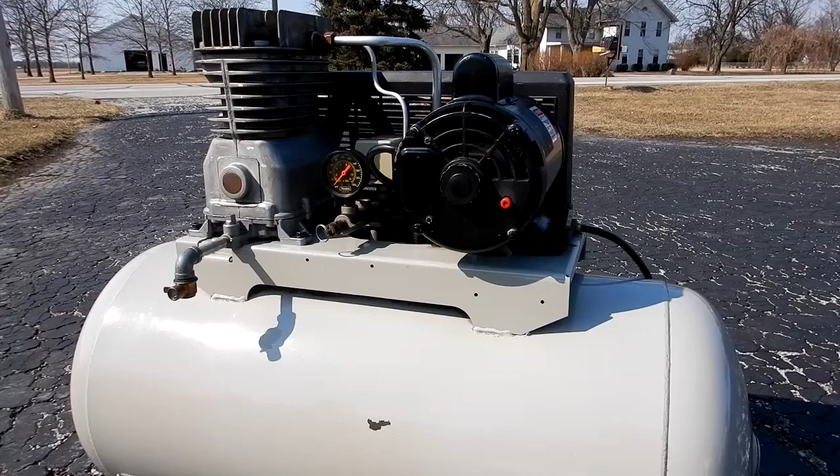Well guys, this is my beloved stationary air compressor that I bought from Sears back in 1984. This actually was made by DeVilbiss though, the DeVilbiss Company, and I just put this out of commission 3 years ago in the summer of 2019, and I haven't used it since. I was going to make it a portable unit, just never got around to it, so I'm going to put it up for sale, and I thought I would showcase this before I do that because it's been a very good compressor. No issues. It runs strong to this day.

This is the model number 919.170250. The manufacturer number was a 383-01185.

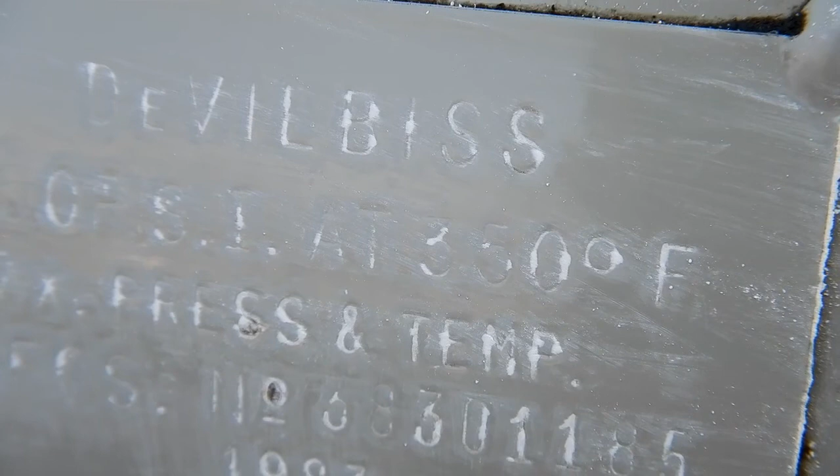Alright, it's somewhat hard to see that tag in the back, so I went and put some chalk on it, wiped it off so we could see the imprint better. But it says DeVilbiss. It's got like a maximum temperature of 350 degrees Fahrenheit, and something about the air pressures. We have the manufacturer number, which I read earlier, and then it shows the manufacturer date, 1983. And as I said, I bought this in 84. I believe it was in the beginnings of 1984.

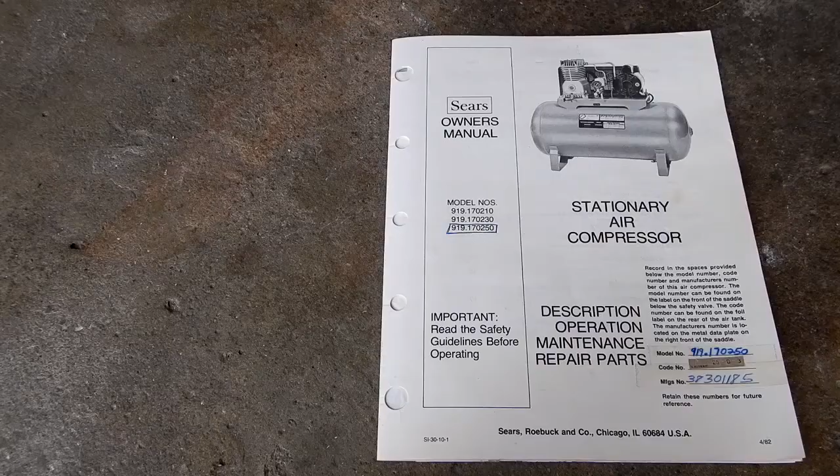As you can see here, guys, I still have the original manual. Here are some of the specs.

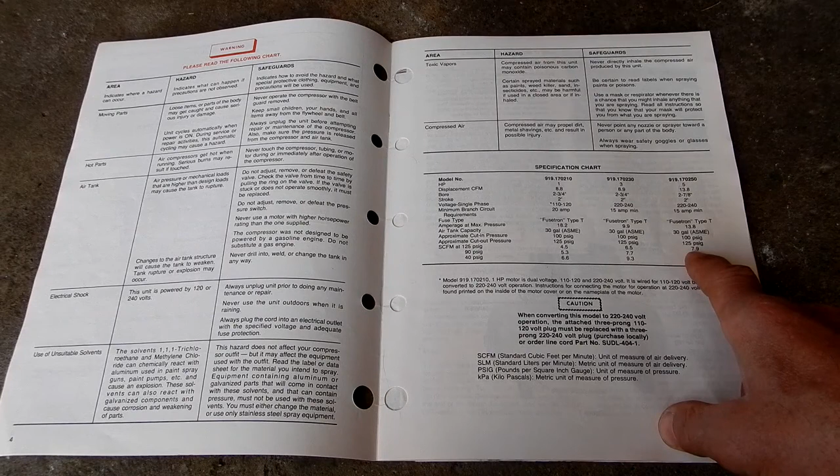Now, they had a 1, 3, and a 5 horse model. Mine is the 5 horse. The displacement, cubic feet per minute, is 13.8. The bore is 2 7/8 inch. The stroke is 2 inch. It's a single phase from voltage 220 to 240. Minimum branch circuit required 15 amp. Amperage at maximum pressure 13.8. And it is a 30-gallon tank. The approximate cut-in pressure 100 psi's. Approximate cutout is 125. And then your capacities, the cubic feet per minute is 7.9 at 125, 9.3 at 90, and 11.3 at 40.

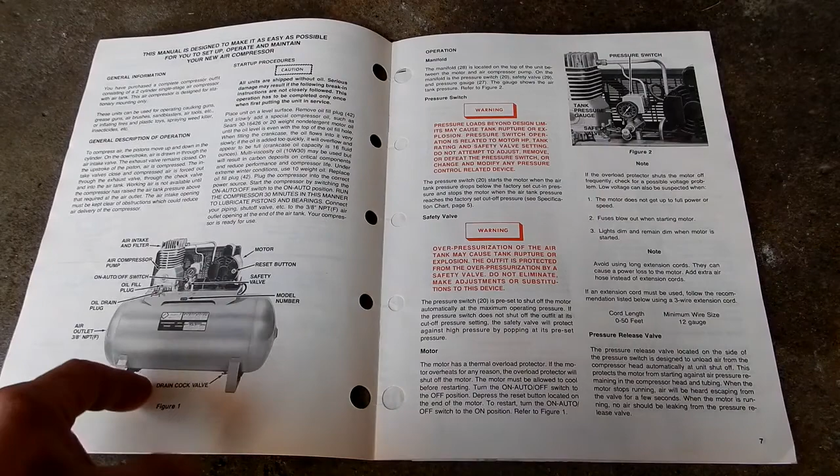And then page 6 and page 7, it shows what the various different parts are of the compressor. Over here it shows the pressure switch and gives you information on all that.

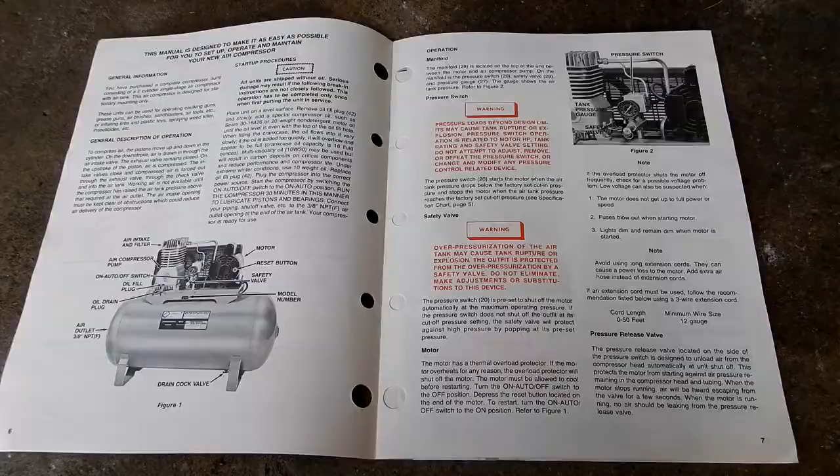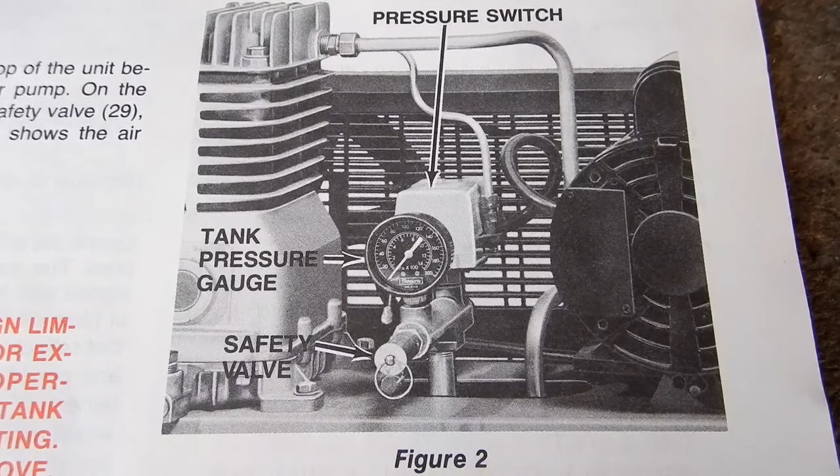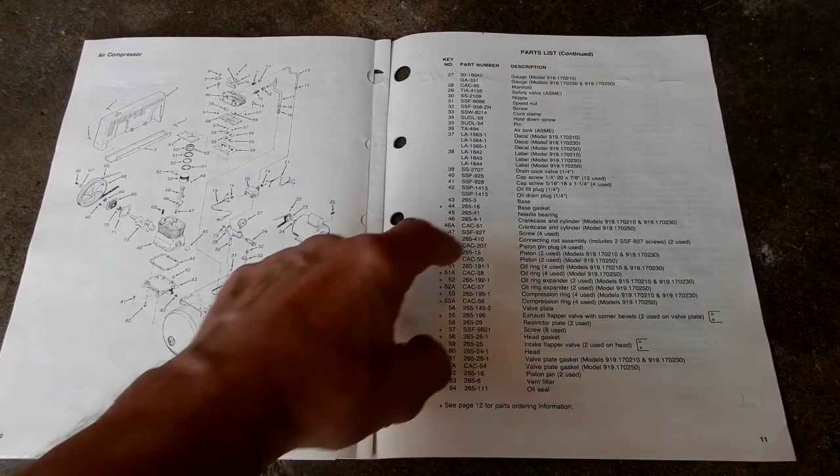Now I've attached a few things on this side, and I'll show that later. But here we have a parts list. And then here we have a breakdown of all the parts. More of a parts list over here.

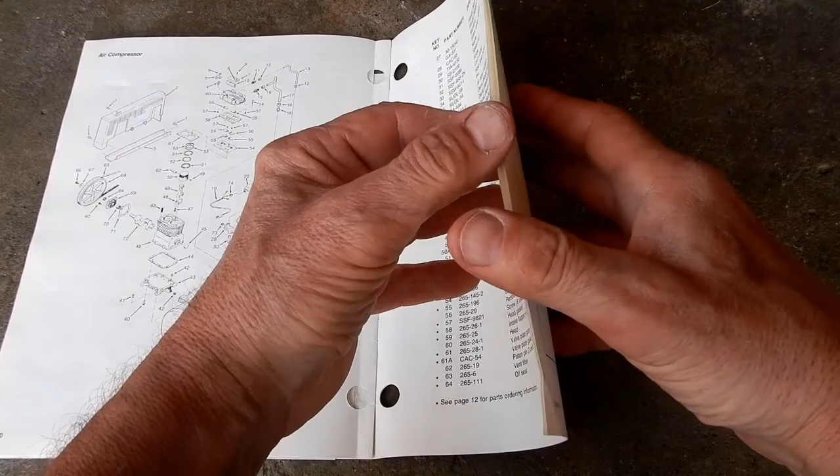And this happens to be, just several years ago, I bought a brand new belt for it. The old one was looking a little bit rugged, cracked, so I bought a new one, and that's why that's there. And then here we have the belt information I wrote down when I bought that belt. It is a 46-inch belt.

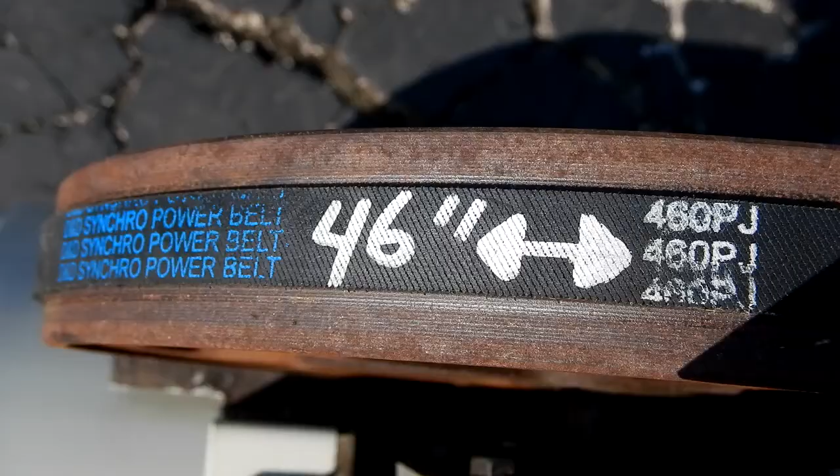Now guys, this is actually part of the catalog when I bought this compressor from Sears. Now you can see the one I have is down here, the 5 horse. It's at the very bottom. Again, it's showing the catalog number as a 30 T 17025N. And then we go across here, we see that it was 158 pounds, that's the shipping weight. And we're going to see that the price was $739.99. I bought this back then for $619.99. That was a hell of a lot of money back then.

But again, this is a DeVilbiss. I'm telling you, the thing is made exceptionally fine. Hell of a good unit. Again, $619.99 is what I paid for this.

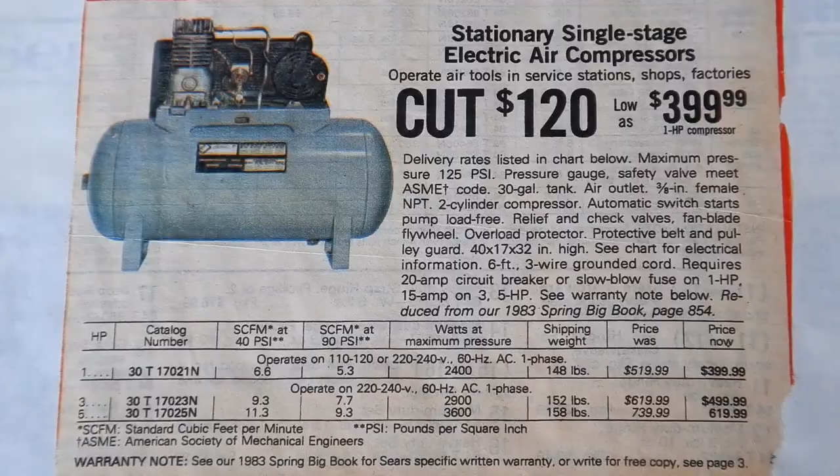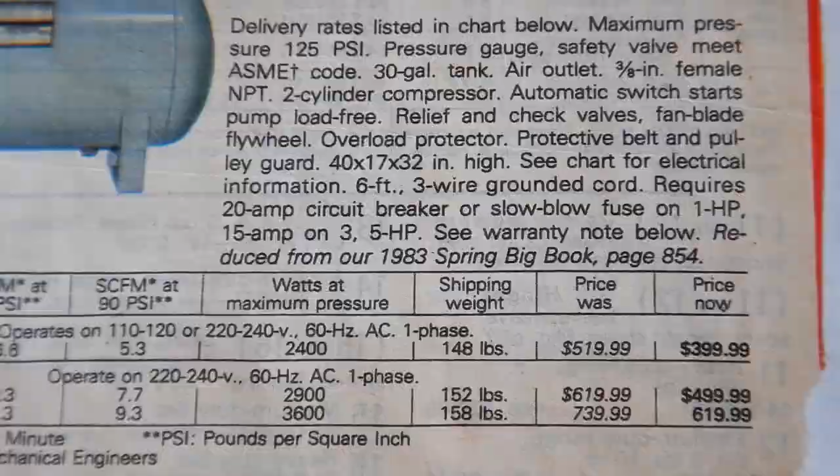This was an interesting article that I had found. It was from Thursday, March 20th, 1986, page 43. And it is about the 1,000,000th Craftsman compressor to roll off the production line at the DeVilbiss Toledo plant.

Well, guys, how times have changed. I'm not sure who's making them anymore for Craftsman. I do know back in the day, I bought a lot of tools from Sears, and a lot of their stuff was made by very good manufacturers back then, and they would just put their name on it. And again, this DeVilbiss is just an excellent unit, and can't say enough about it. Even though it's old like that, it's still strong.

Change your oil every year, you know. And I always had a fan mounted above the air compressor, so if it ran for more than normal, by that I mean if I wasn't just using it to air up a tire, but if it was running to run an air tool or doing something longer, I had that fan on because it was in the back corner of my garage, and I wanted to make sure there was good airflow going across the unit to help keep it cool, you know.

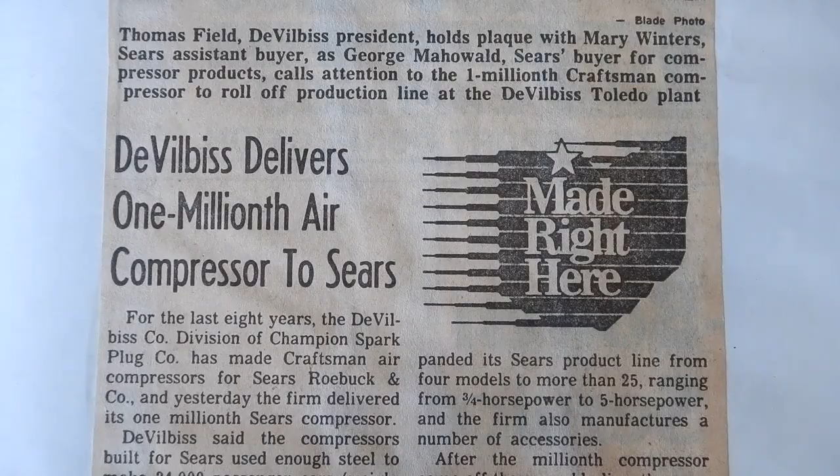So anyways, can't speak highly enough of this compressor. And for anyone interested, you can pause the video and read this article.

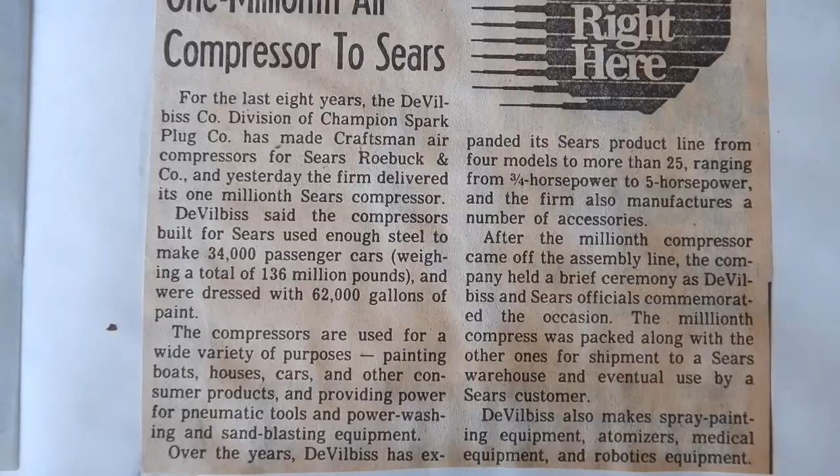So I found this little tidbit of information. DeVilbiss Air Power Company was founded in 1888 with headquarters in Tennessee. They manufactured air compressors, air tools, pressure washers, generators, and more. Today the brand is included under MAT Industries, LLC. In 1999, DeVilbiss was sold to Pentair, who then sold their company to Black & Decker in 2004.

And something else I found: Stanley Works merged with Black & Decker in 2010, and then Black & Decker sold the DeVilbiss Air Power line to MAT Holdings in 2011. Amazing how you don't know today who makes tools that used to make their own tools. They sell out to so many different companies, you really don't know anymore. For any further research, if you're interested, Wikipedia has something under MAT Holdings that gives more information.

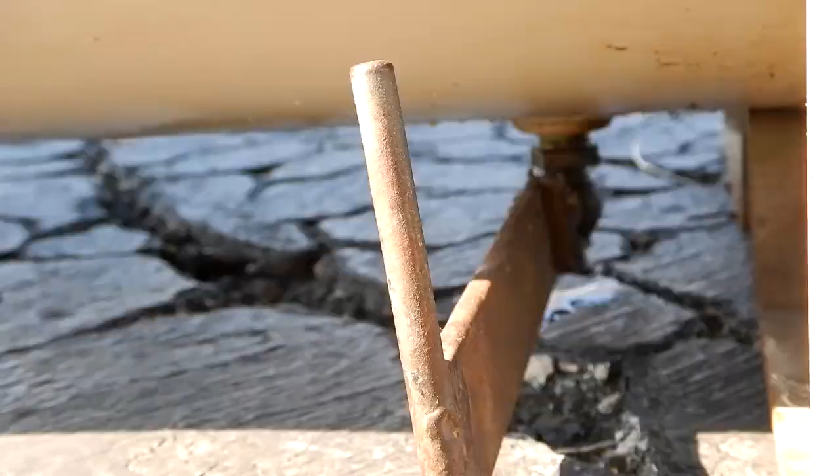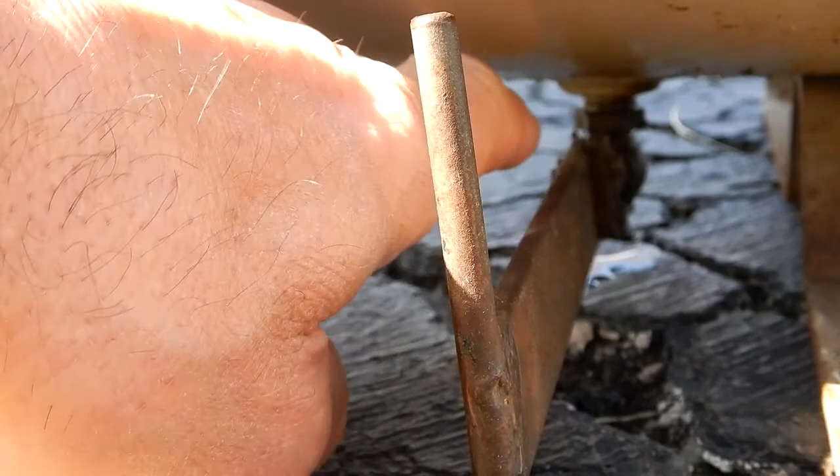So let's check this out. One of the things you see here is the original drain valve that came on it. I replaced it with a different drain valve that had a larger handle on it, and it's hard to get back in there. Again, this was permanently mounted.

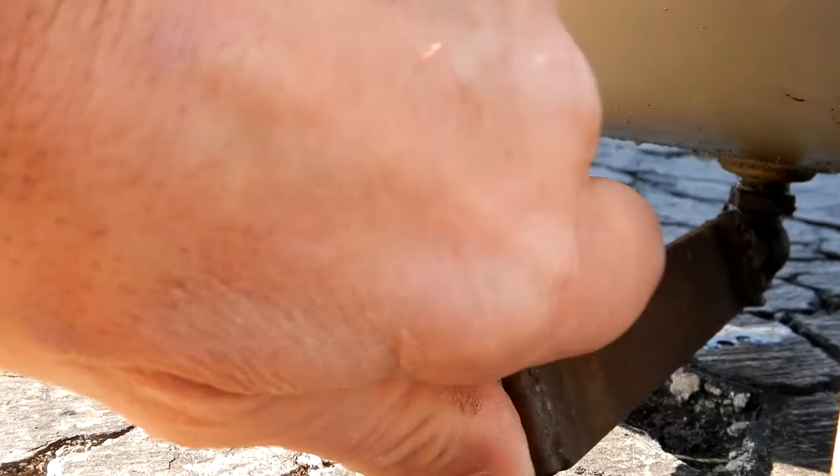So what I did is attached this flat bar stock, and then brazed on this handle here, so that when I wanted to drain it or close it to operate it, all it was a matter of turning this like this, and you close the petcock there, or to open it like this. It worked out very well.

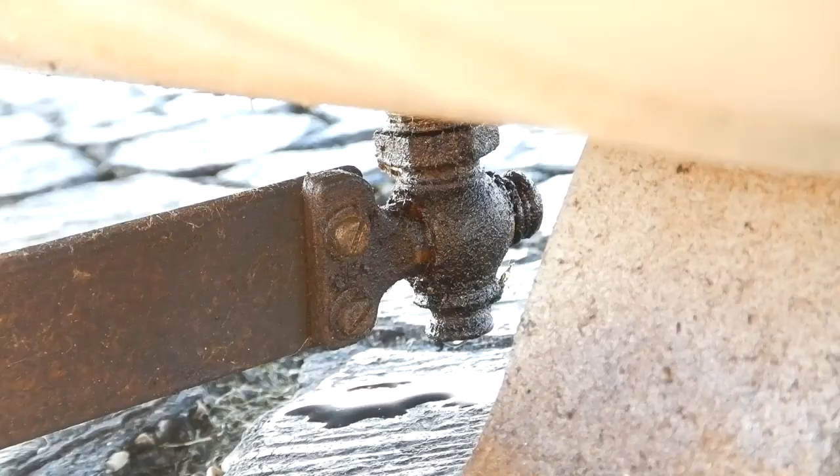The handle being like this, parallel with the tank, meant it was closed. Like this meant it was in line with the flow of the petcock. Otherwise, I don't know how you'd be able to get in there, because it was very hard to get your hands in there with the original setup. I had to change the petcock because it needed a different type of handle. Here's a close-up of what I'm talking about. You can see how that is and how I attached that extension to the drain valve. That's original, from shortly after I bought it, and it's been on there all these years.

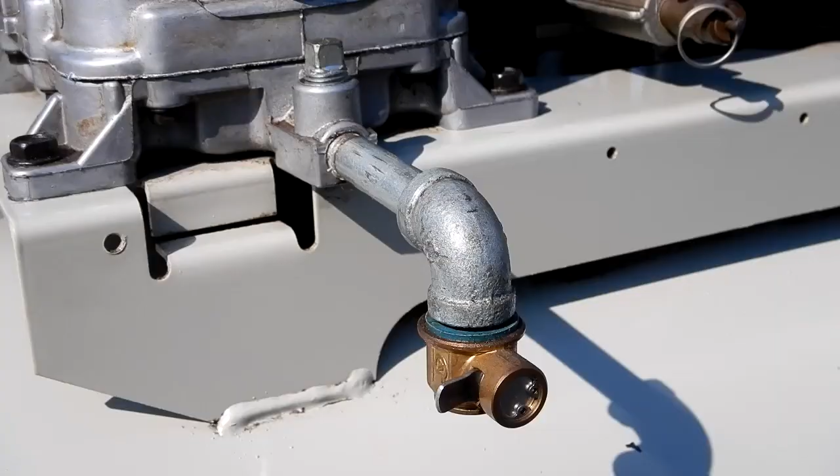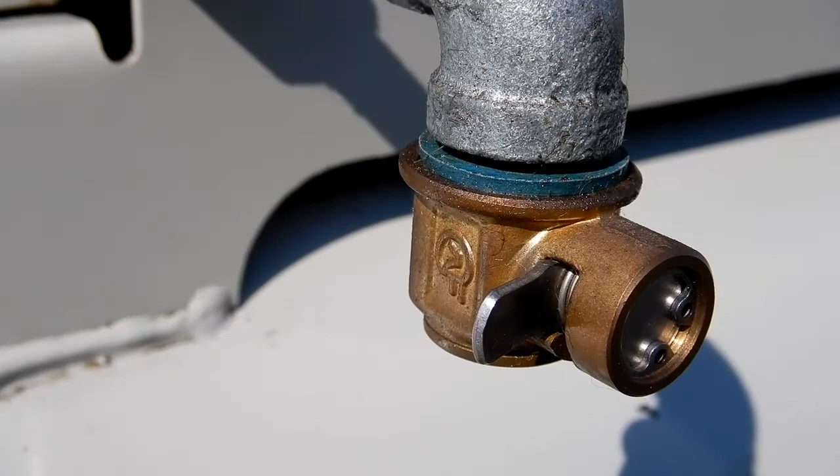Another thing I did - and all manufacturers, even today, are guilty of this - they have the drain plug right up here where it'll drain down onto your tank and make a hell of a mess. So what I did is put an extension nipple on it with a 90, and then put one of these Fumoto drain valves on it, which I did a video on for my car, and they work excellent. Now when it's time to drain the oil, I just put a bucket underneath, open the valve after the oil's been warmed, drain it out, and then close the valve off and you're good to go.

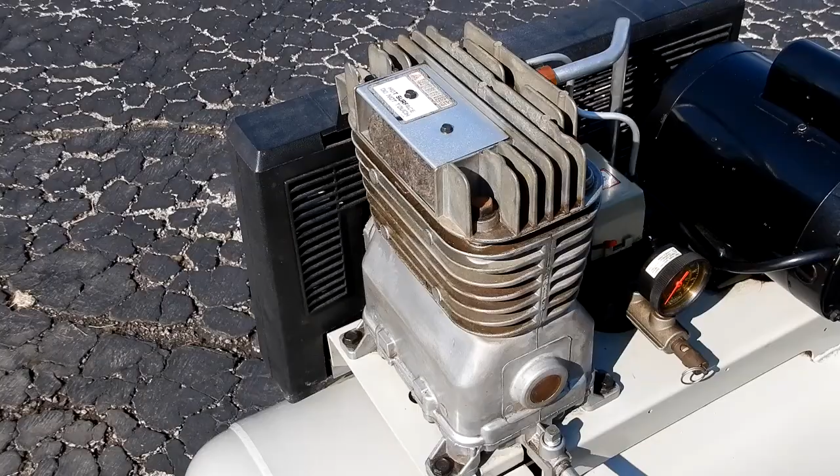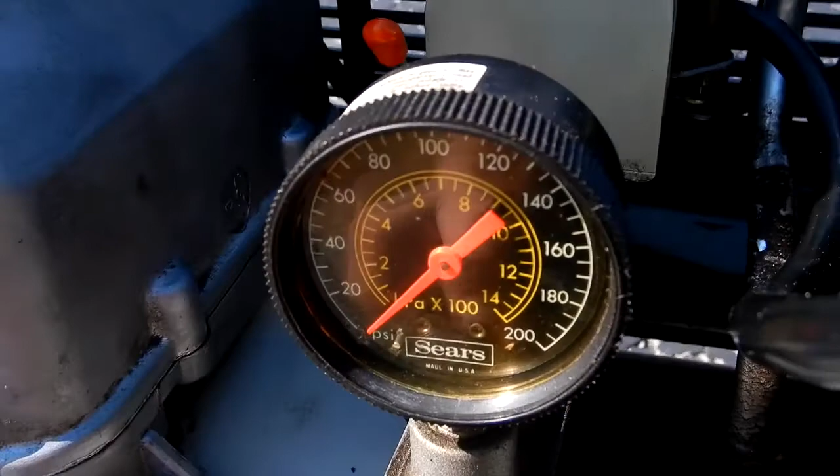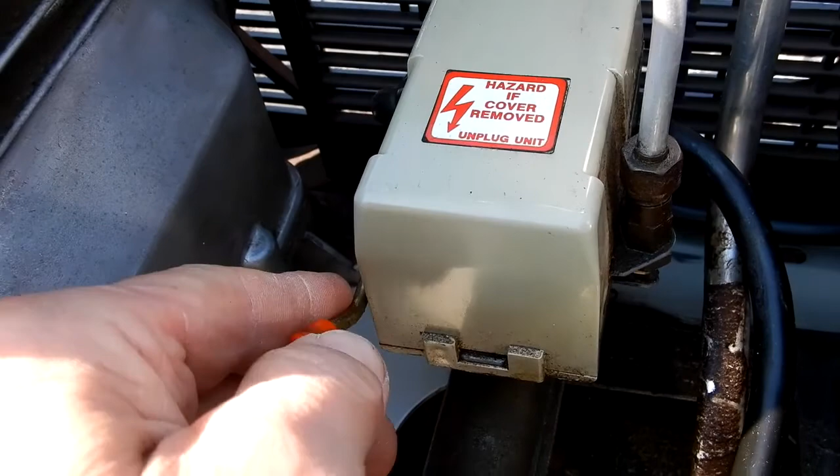Here you see the pump - haven't done a thing to that. The original pump runs fine to this day. The safety valve, original safety valve here. The original Sears gauge, and then right behind it is the shut-off switch. This is the original switch.

One thing I did though, instead of using this switch all the time - being that it was back in the corner and I had my toolboxes up perpendicular to this - is I made a number 10 gauge extension cord that I plugged into it, so that when I wanted to turn this on and off, I just plugged it into the outlet. So this switch has basically been used maybe less than 100 times. I'm using it more right here now than I probably have since I first got it, because I just didn't want to turn this on and off, being back in the corner and harder to access. It was just easier to have that extension plug to literally turn it on and off. I always left this switch in the on position, obviously.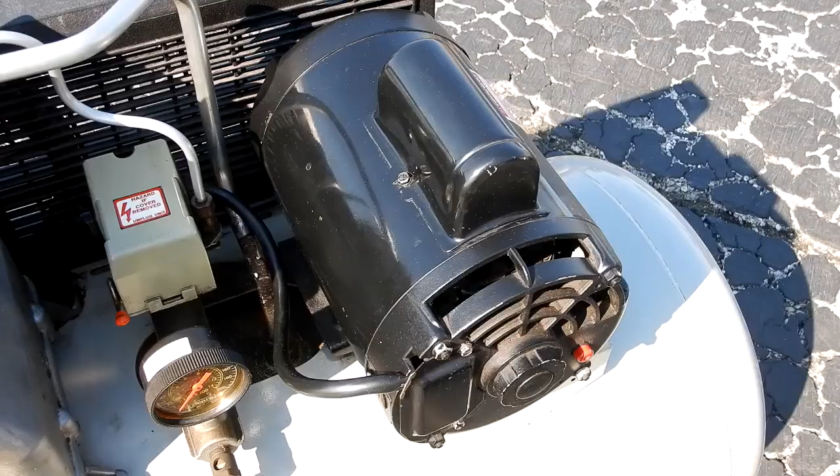Here we see that 5-horse motor, guys. It is original - never touched it, never did a thing to it, never ever had to reset it, never ever.

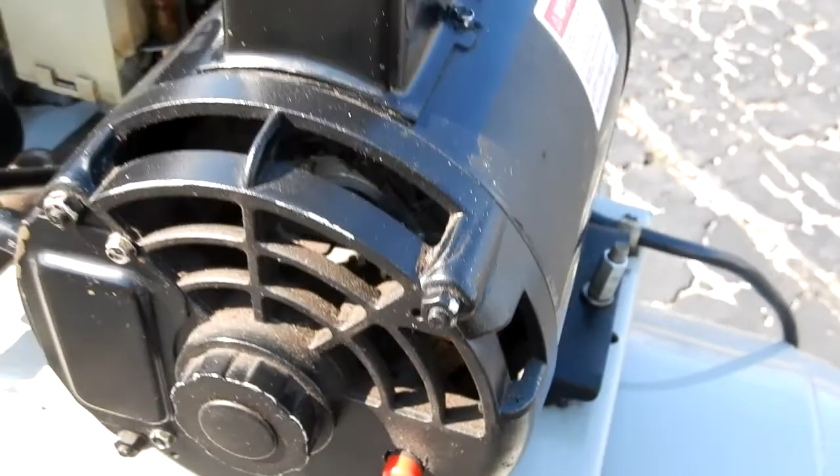One of the things I did that I liked better - I didn't like what they had to tighten it down with, it was harder for me to do. So I took one of these coupling nuts and used it to tighten down the belt, since this motor is on a pivot. That's something I changed right there, and it worked a lot better. Once you set it, it never really needs adjusting unless the belt stretches a little bit, but I found this to be a whole lot better than the original setup.

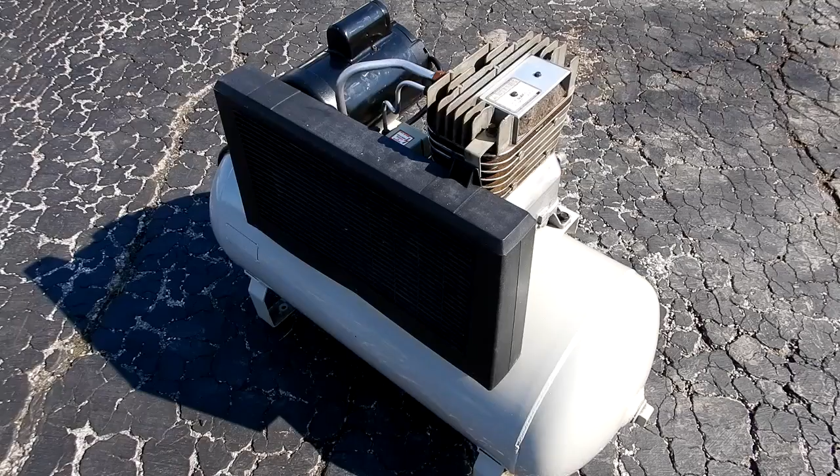Looking at the back side, here you see the guard. I've had that thing off for years, and I've lost all the mounting hardware, the bolts and all. I left it off because it was back in the corner, I never needed it, and I could keep an eye on things better without it on.

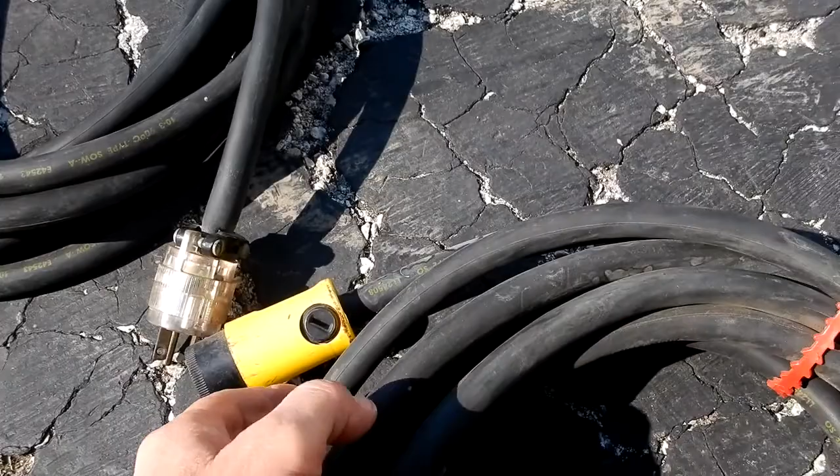So let's fire this thing up, guys. Since it's outside, I'm going to use these two 25-foot extension cords that I made up - heavy 10 gauge, very heavy. I made these back in the day when I bought my industrial table saw, a Rockwell Unisaw, back in 1984. When I was using the table saw in the garage, I'd use one of these 25-foot extensions, but a lot of times I wanted to take it outside, so I needed the extra 25 feet. Rather than have 50 feet, it's so much better to use the least amount of extension needed. That's why I've got these two.

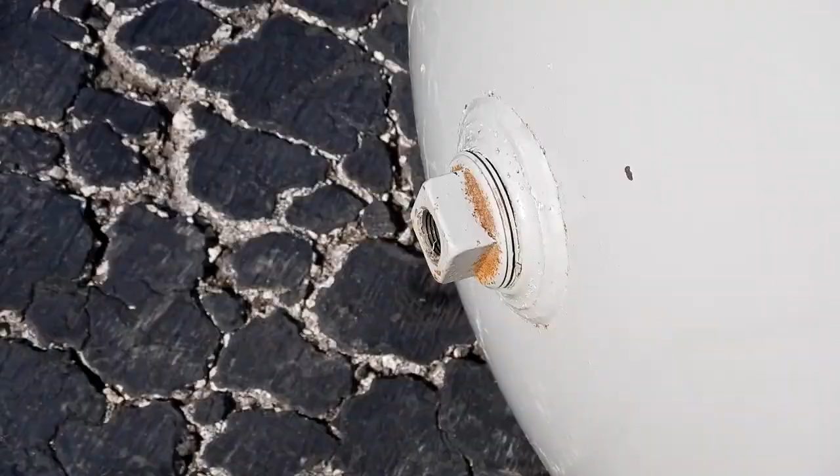First thing I've got to do before you fire it up is put this plug in it.